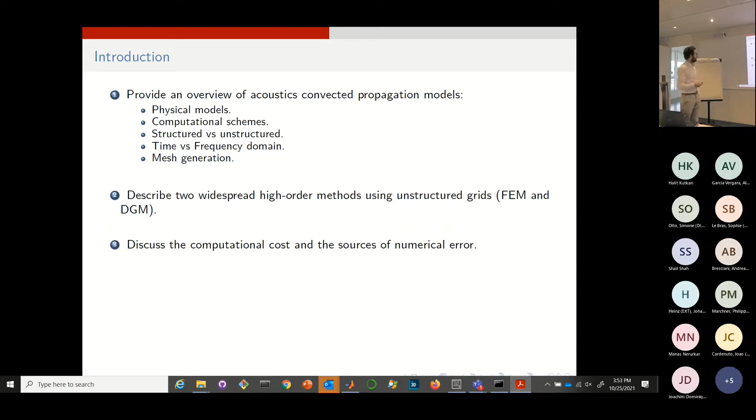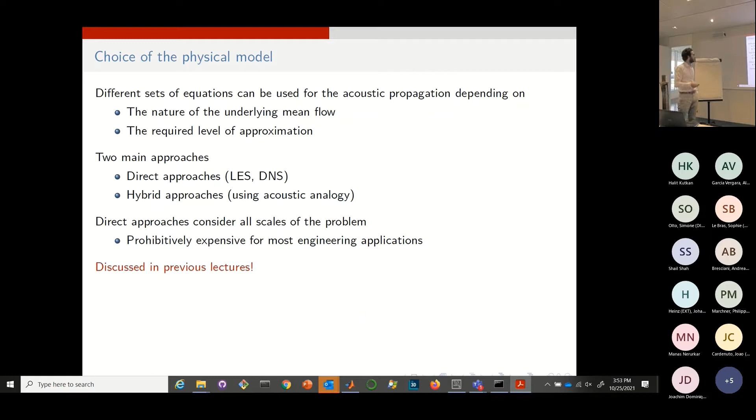That's a bit of a recap of what was discussed in previous lectures. Different sets of equations can be used for propagation depending on the nature of the flow and the level of approximation. There are two main approaches, what Sophie called DNS and hybrid approaches, and direct approaches. DNSs can be prohibitively expensive for most engineering applications, and I hope this was clear from this morning's lectures.

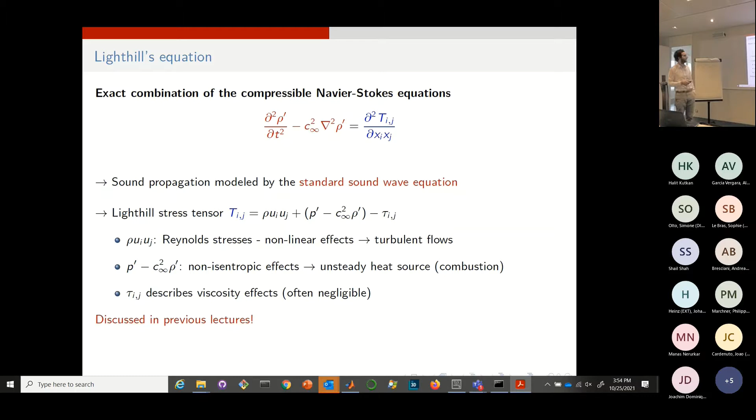This is a slide taken from Sophie, just to insist again on the fact that I will mostly focus on this part of the analogy, whereas Sophie described more the right-hand side in the previous lecture. So I will talk mostly about the propagation aspects.

Starting from this, a brief word about the lecture and its angle: it will mostly be seen from an engineering perspective.

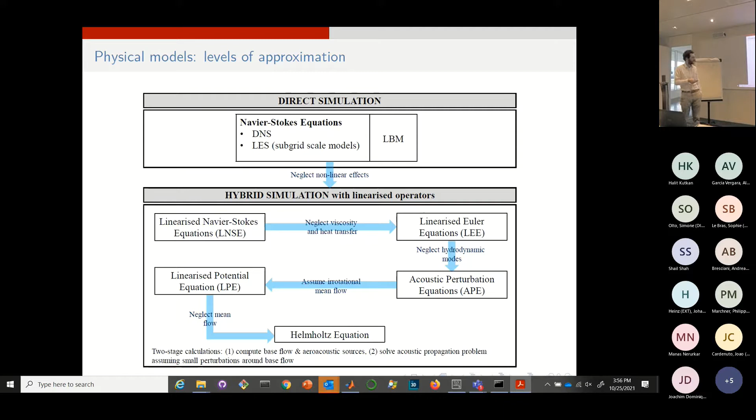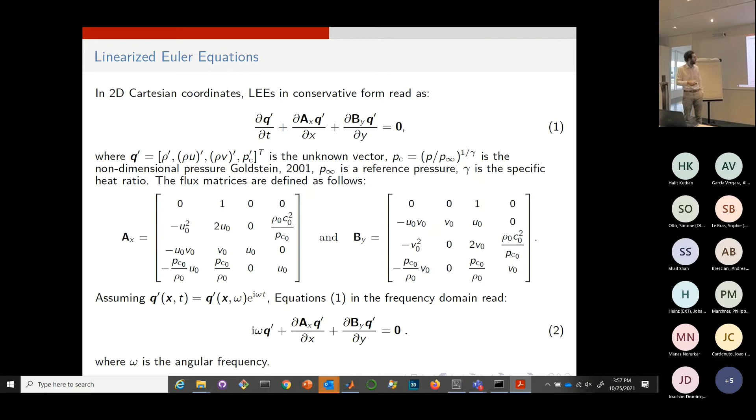Sorry, what do you call conservative pressure? I think it's pressure under Lilley's form. I don't know, it's P up to a factor, essentially. It's what we use. It allows you to write the LEs in conservative form to keep the hyperbolic form, but you can obtain the pressure from it very easily.

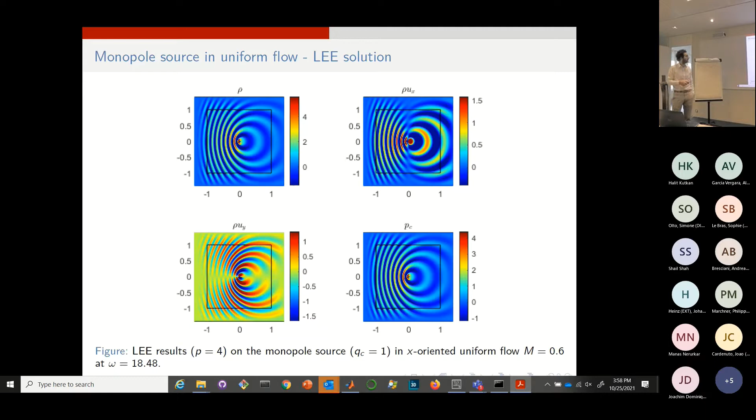So it's basically pretty classical. Now, interestingly, when you now consider a dipole, you take as the right hand side...

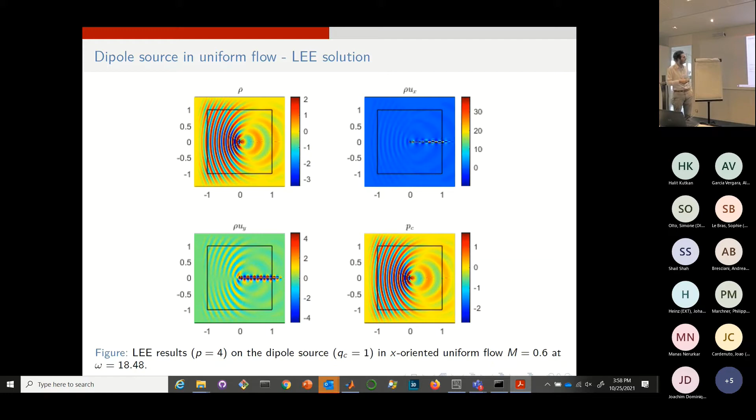So let me now dig a little more into what really the LE can support as types of waves. Actually, the LEs can support three types of waves: acoustic, hydrodynamic, and entropy waves. Each of them has a different dispersion relation.

That can be expressed in time or in Fourier domain. Note that the entropy and hydrodynamic waves, which are purely convected, are ruled by the same dispersion relation.

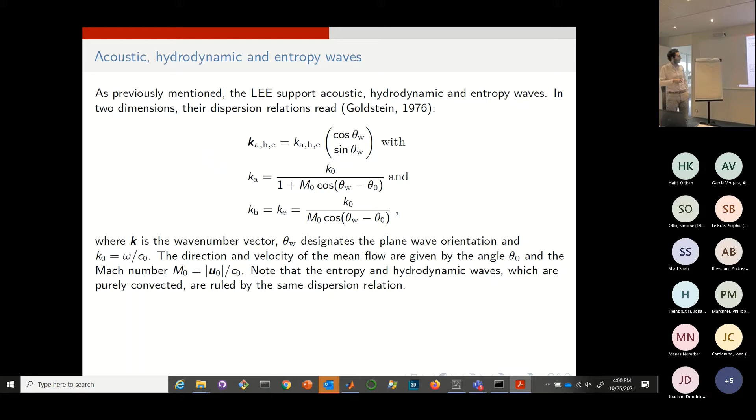Now we will have a look at two graphs which are a bit complex, but if you can understand this, I think they are very revealing of the physics at play in the LEE.

Sorry, excuse me, we're having a course here. We have to keep the doors open. Thank you.

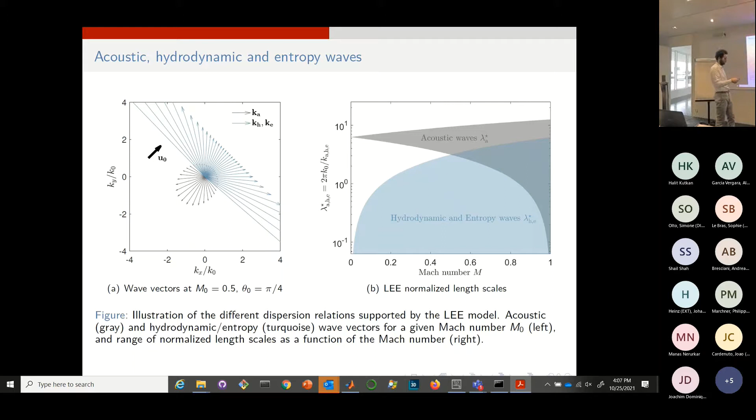Is there any imposition of a Kutta condition at the trailing edge in here, or just - you see what I mean?

No, there's no imposition. Now I think that numerically you don't necessarily need to impose it because - maybe, I don't know, you're ensuring that all quantities are finite by nature, but that's a sort of... Okay, yeah, but it's always complex, things. So here it's mostly leading edge.

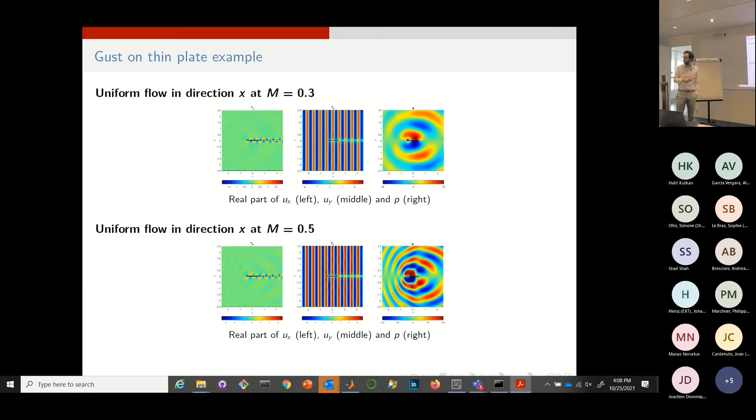Okay, now about the LE again. So the key message to bring home is that it supports acoustic, hydrodynamic, and entropy waves. Entropy and hydrodynamic waves are sheared waves, only convected with the mean flow, which have very different length scales. It depends on the Mach number regime.

Now, it's a very rich operator, but the fact that it's a very rich operator also leads to some issues.

So if you change the mesh - and this is certainly aligned with the remark of Miko, that whenever you have a numerical model, try to introduce some variations to see the sensitivities. That's something you can do. You change your mesh size, and you will realize that basically...

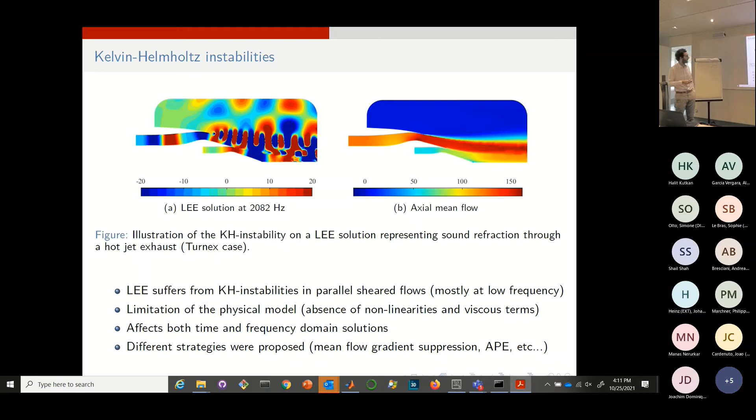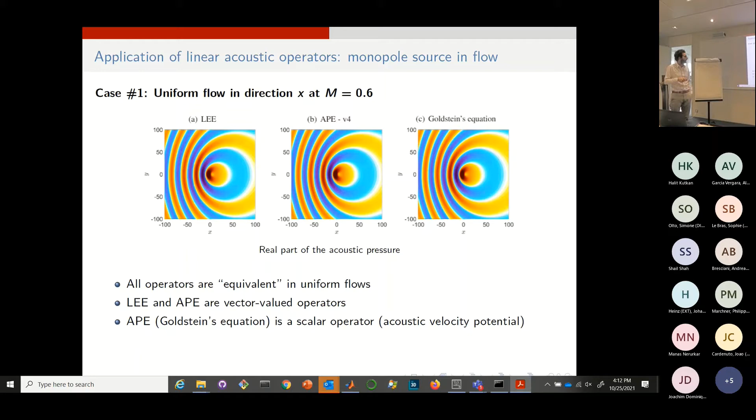And what I mean by mildly sheared flows - it's always in relation with the wavelength. So you always have to relate the gradient of the mean flow, the mean flow variations, and their scales, to the wavelength.

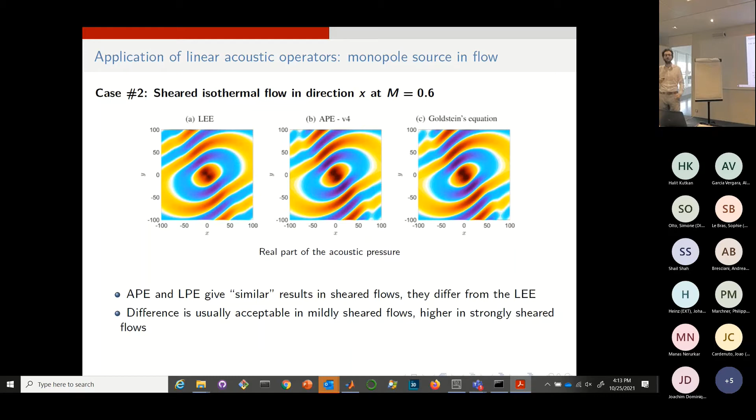And that's a generality. In the high frequency limit, these operators, AP and LPE, will converge to the LE solution. When the wavelength becomes really small compared to the variations of the mean flow, then you will converge.

But differences between these sort of approximate operators are usually emphasized in non-isothermal flows. So basically you can use those operators in sheared flows as long as they are mildly sheared, again in relation to the wavelength, and isothermal. If you use non-isothermal flows, you should really be careful if you have strong density variations.

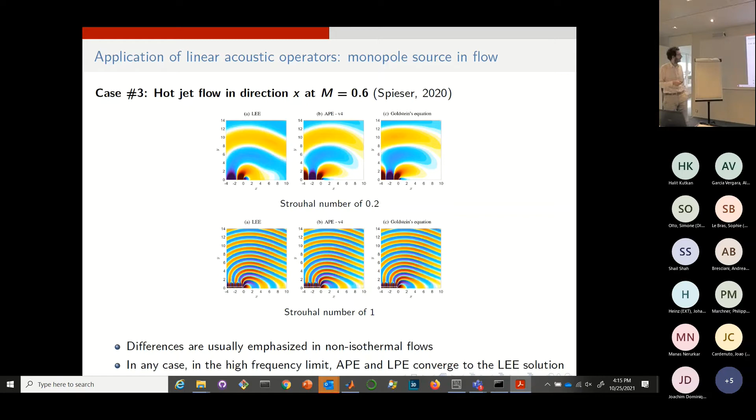So now moving on to... I have until 5? 5, huh?

Okay, thanks. So when you talk about solving these operators, you could think of modeling them in frequency domain or in time domain. When you do acoustics, you always have this duality, and depending on whether you did your PhD in time domain, 10 years after, you will always prefer it, it's a bit dogmatic somehow. But if you look at things in a neutral way...

Frequency domain is well suited for tonal noise. If you only have just 1 or 2 frequencies to compute, it seems evident that it's the right approach. Linear problems, obviously, but you can use it for broadband as well. You just need to compute many frequency lines to obtain a frequency sweep with enough detail in your spectrum.

Consider the way to avoid instabilities. It's true, I can speak personally, I was very frequency domain guy, and when you move to time domain, there are numerical errors or approximations that you can manage in frequency domain, it works. When you move to time domain, it's more demanding, because those errors tend to pile up as time increases.

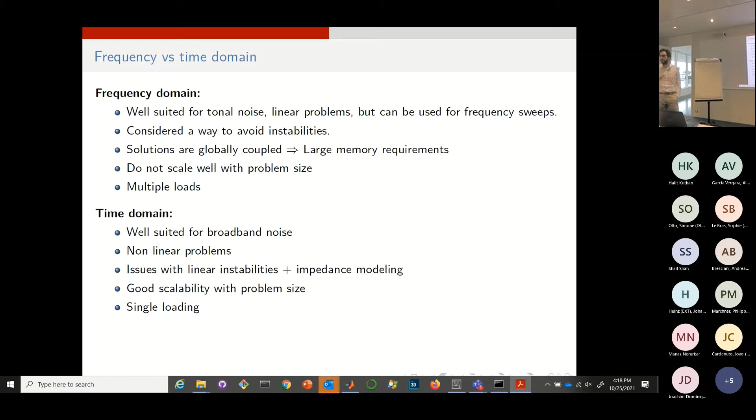Time domain, on the other hand, is well suited for broadband. You can do nonlinear problems, obviously. Again, as a general statement, it usually requires being very careful about discretization errors and stability. It forgives less, but it has good scalability with problem size, though you can solve only one load at a time.

Now you also have two main classes of spatial discretization schemes: unstructured methods and structured methods. Again, depending on what you used during your PhD, you somehow have a preference. It's funny to see that years after you still have this sort of preference.

Structured methods: it's easier to achieve high accuracy because you can reach low dispersion, low dissipation easily. It's a simpler data structure that leads to better optimization, especially on GPU. Now, designing grids for complex geometries is time-consuming and requires care to maintain grid quality. This is the major hurdle for the larger deployment of structured methods.

Recently there has been a breakthrough where people use more and more what we call immersed boundary methods, where you take your structured grid and place your CAD or geometry into that immersed grid. It's sort of hybrid because you're structured in most of the domain and unstructured along those immersed cells that you need to treat in an unstructured way. But you can still gain, because it reduces the complexity to only D-1, where D is the dimension, since your immersed cells will only be on the surface, so their number is limited.

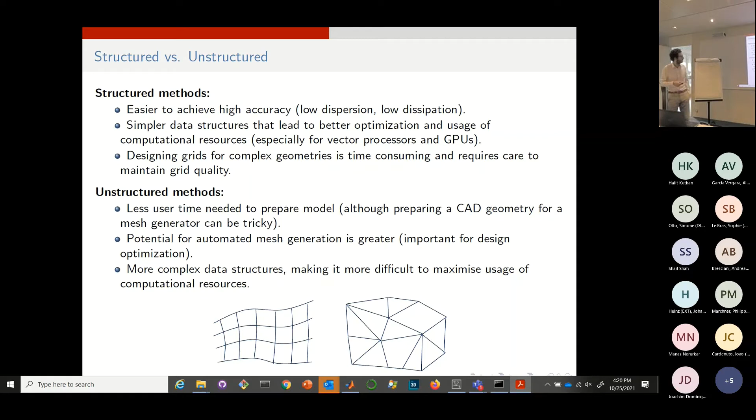In terms of numerical methods, you have the finite difference method, finite elements, the discontinuous Galerkin method, and boundary elements that are used in acoustics. In terms of whether they can cope with complex geometries, non-homogeneous media, and whether they are high-order accurate, I think the two most general techniques are FEM and DGM. FEM is mostly used for elliptic problems - that's a generality, kept a bit caricatural, but make sure you understand the main figures. I'd say FEM is most widely used for elliptic problems, formulated in the frequency domain, whereas DGM is typically used for time domain, hyperbolic problems. But again, there are versions of DGM also applied to elliptic problems - I'm summarizing.

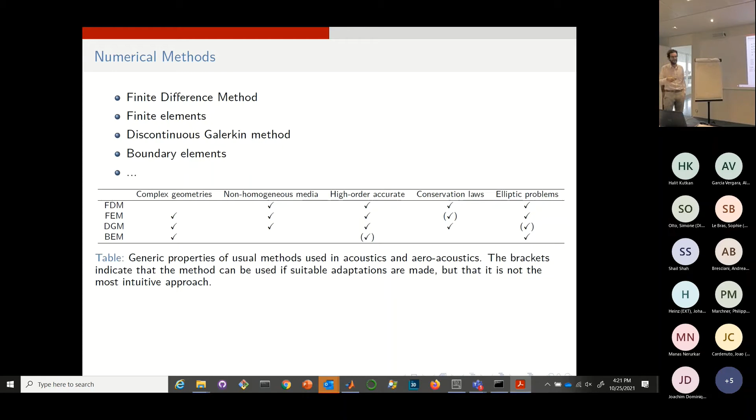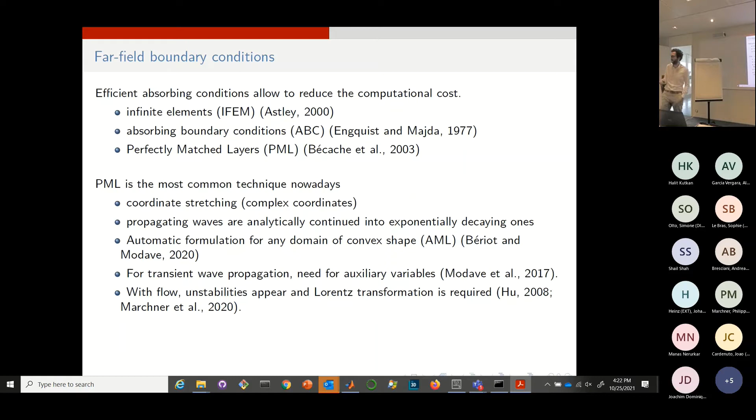About far-field boundary conditions, that's also very important when you do finite elements, DGM, or even finite difference - you want an efficient absorbing condition. There have been several, dedicated to acoustics, not buffer zones and so on. For acoustics you have infinite elements, absorbing boundary conditions, and perfectly matched layers. I think PML is the most common technique nowadays. I won't go into too much detail because we'll talk about this in depth on Wednesday, where you'll code a 1D PML and play with it to understand its principles.

There could be flow, right? I mean, not in this application - it's not fast enough that you'd need to include the mean flow convection effects. Do we know the speed of Tintin? I don't know the speed of the Tintin submarine. Just from the size of the propeller, I'm just guessing.

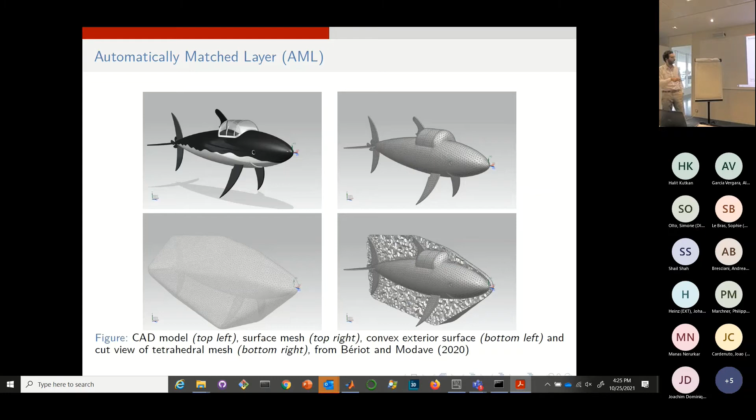But it's fully coupled, so it will be a dense matrix. It's too expensive, so we use approximations. You can use infinite elements, absorbing boundary conditions, or PML, and that's what we do here. The PML is generated automatically from this surface, but you'll learn more about it on Wednesday. This is the result of the scattering of that plane wave on the shark submarine.

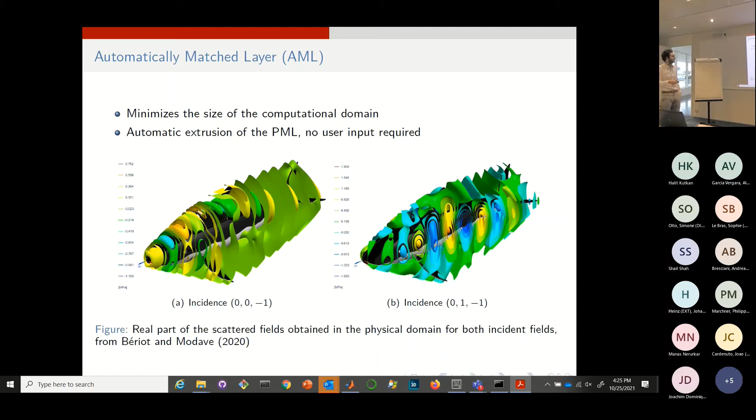About mesh generation, there are different types of algorithms. I think there has been a lot of progress in that area in the last 20 years. Now, in most commercial software, this is more and more automated. There are advancing front methods, Delaunay triangulations, and some methods even use octrees and quadtrees, these immersed boundary methods I mentioned, or even conformal approaches.

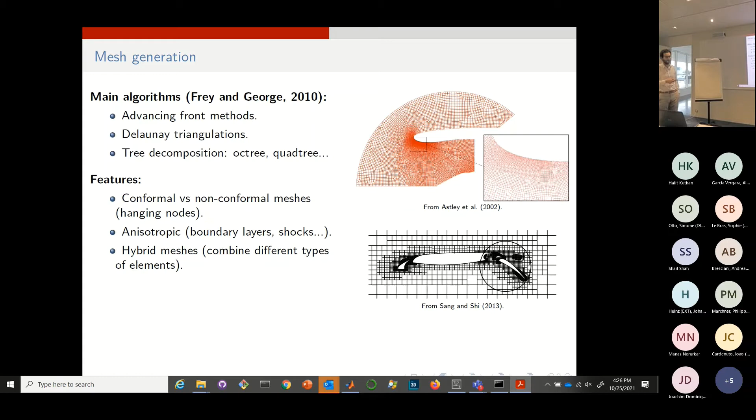You can also have anisotropic meshes in Star CCM+. Now they really have anisotropic mesh refinement that follows basically - you really see the mesh following the shock waves. But this is among the most advanced meshing technologies.

I will skip this. So I'll take a bit of time now to talk about frequency domain finite element methods. That's one approach to solve acoustic problems - to formulate them in frequency domain and use them to resolve them.

I'm going to talk mostly here about linearized potential theory. That's the LPE operator I talked about at the beginning, which is widely used in the industry for concrete aeroacoustic propagation problems, like the nacelle aero engine problem you will look at with Kortian tomorrow morning. Kortian will actually show you, hands-on in the software, how it works from A to Z to model such a problem in a commercial software.

So here we're solving a simplification of the linearized Euler equations. That's describing perturbations in potential mean flow, a near-irrotational mean flow. So there's only one variable, which is the velocity potential - it's a quite lightweight operator.

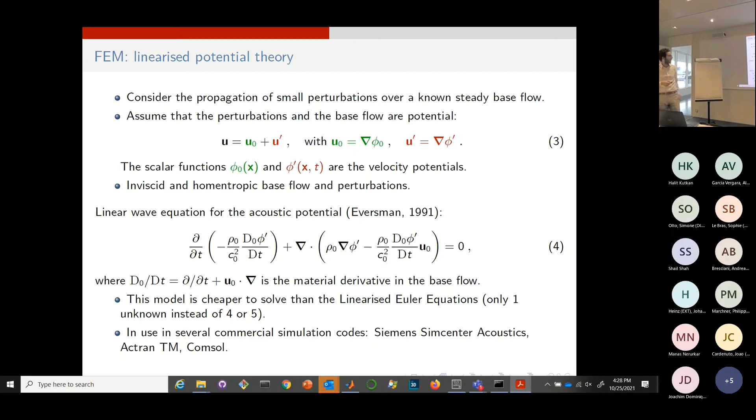It's used in several commercial simulation codes like ours, but also Actran, and COMSOL has it as well. This is used daily across the world to solve problems of convected acoustics. I think LEE so far is mostly used in labs, whereas routinely in industry people use the LPA operator to define, for instance, the liners in the nacelles. You will see that with Kortian.

So it's a classical Galerkin approach. I will not insist on the formulation itself.

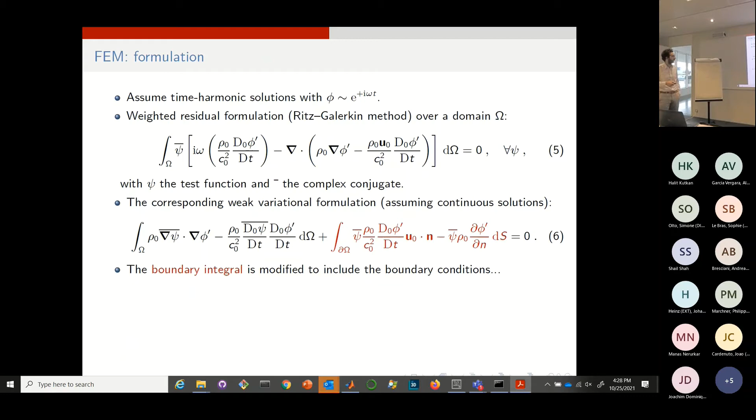The nacelle itself and this treatment are there also for acoustics, and the liner is there only for acoustics. It's designed to absorb, for certain regimes, certain flight configurations, especially when the aircraft is close to the community - when it's flying really high, then it's less of a problem. So takeoff and landing mostly, and cutback. This liner is tuned to basically make sure that mostly tonal noise is reduced.

If you hear aircraft today, when they fly over Brussels, which happens a lot, you don't hear tonal noise that much - that's my experience at least. You hear mostly airframe noise, and broadband noise from the fan. And the turbine - there's still a bit of whistling that is the turbine. But it's downwards.

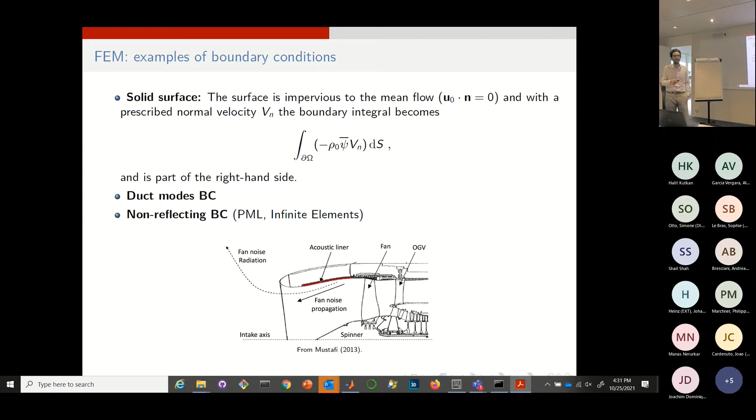There's still one subtlety, which is that the interaction of the boundary layer and the acoustic liner is very important, and it's not trivial to write. So we don't want to resolve the boundary layer in our operator, we're just going to consider a uniform flow and remove it because it's too small a length scale, it would kill our simulation if we had to model it. So we simply truncate the boundary layer, and then we apply what we call the Myers condition, which represents the continuity conditions between what happens above the vortex sheet and the liner surface. It's considering an infinitely small boundary layer, and it writes the continuity conditions so as to correctly represent the influence of the liner on the acoustic quantities.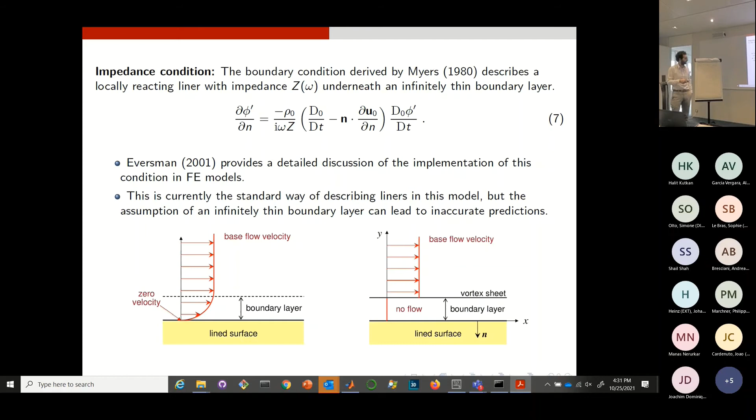So about the shape functions themselves, I will move on. I won't insist on this because we'll revisit it on Wednesday during the hands-on session with Simone. But basically, in finite elements, the solution is continuous. We construct a continuous solution across the full mesh, and for that we typically use linear and quadratic Lagrange shape functions. These are the standard shape functions. If you did FEM, I think most of you did some finite elements, you will have used these shape functions.

But actually, for acoustics, high-order methods yield significant benefits. Why is that? It's because acoustics is mostly about smooth solutions, representing linear combinations of sines and cosines. It's not like turbulence or shock waves where gradients are steep, it's basically differentiable. And in that context, if you want to approximate a smooth function, if you do polynomial regression, it's more efficient to approximate that function by increasing the order than by using many small elements with low order. You want to have a big element and use high order polynomial regression to approximate a smooth function.

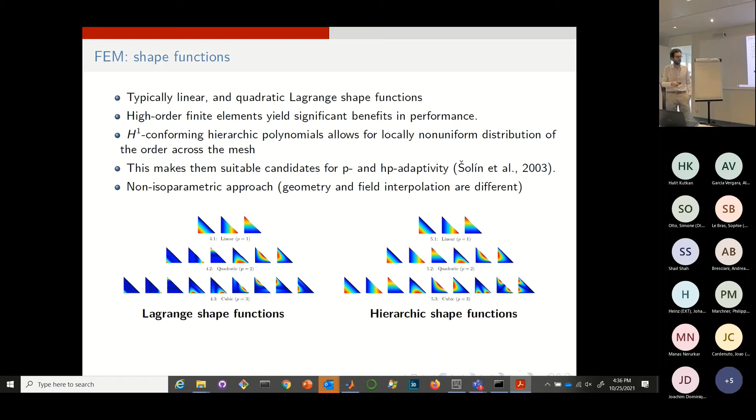But I'm going to increase the order until I get a correct solution. There are different ways to represent the field, what we call shape functions. This is how you interpolate your solution, and I won't enter into the details, especially because we'll look at that Wednesday.

Something important: when you solve a finite element problem in frequency domain, you have to solve at each frequency independently. And you end up with a system that is sparse, because basically when you assemble, this is the final system of equations at one frequency before you solve it.

And each of those, to simplify, here you have 200 unknowns. Each of those lines represents, to simplify, a pressure point that you're solving.

What you get is a sparse matrix, by contrast to BEM, which yields dense matrices. With finite element method, you obtain sparse matrices. Basically, it's because each node is only connected to its neighbors. When you do the assembly of the matrix, each node is only connected to the neighbors, and you will end up with only a few entries per row.

So if you have a structured grid with hexas, you can already infer a priori how many rows there will be in that matrix. How many do you think? How many hexas do you have in the center of your room? Let's say you model this room with structured hexas. How many rows will you have? How many entries will you have per row? 8? Which order? Order 1.

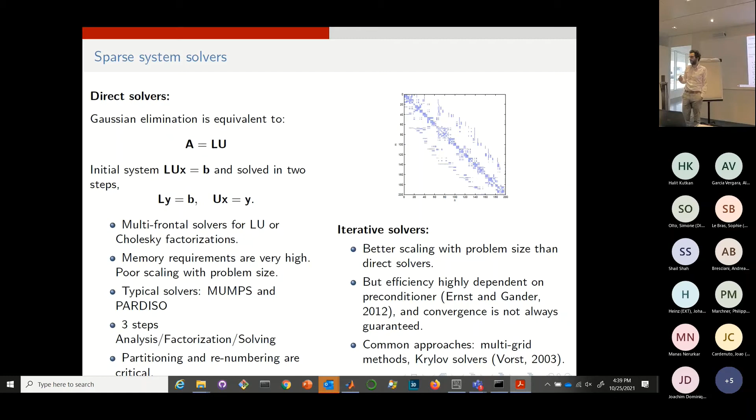About numerical accuracy — that's an interesting thing — when you solve a numerical model, especially for non-specialists, and including for specialists, it's a hassle all the time, because we have a sort of what I would call the error race. There's a competition between the errors. And somehow there is always one that is dominant.

There is always one that is in front, but it's hiding the others. So whenever you do something to tackle it, you will suppress that error, but the one ranking second in that error race will pop up. And you don't know if it's super low or if it's just behind. Sometimes you think you're going to treat the problem, but you're treating the second error in the error race. And since the only one that matters is the first one, you don't improve your solution. You see what I mean?

And that's something that is very puzzling. I think it's the cause of millions of hours of research time lost. So there are multiple errors. There's the geometry error — basically when you use a finite element or a discontinuous Galerkin or even finite volume method and you solve it, you're not going to solve the real CAD. You're going to solve an approximation of it.

Take the very well-known example of the scattering of a plane wave by a sphere. What you're actually solving is not the plane wave scattering by a sphere — you're solving the plane wave scattering by a disco ball, like the kind used for dancing, because it's faceted. So there will be lots of small numerical artifacts coming from this, which we call geometrical error, and it's there in the error race, but you don't know where it is.

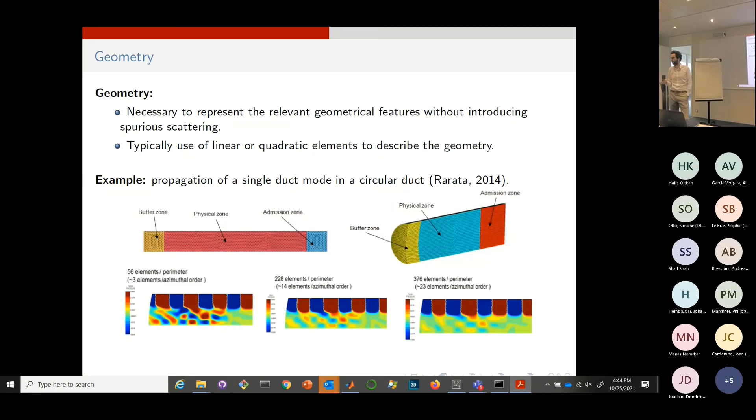So what we typically recommend is to increase your representation of the geometry whenever possible, so to use quadratic elements wherever possible, if you think about finite elements.

Mean flow interpolation is also something we looked at with Sophie, and it's quite tricky. At first I was thinking that if you increase the resolution and make the mapping as good as possible, it's going to be for the best. But actually there's a point where you introduce some super small length scales in your mean flow which are actually noise. There needs to be some smoothing in the mean flow interpolation for some applications, because your original mean flow is never perfect either. So it can be really, really difficult.

But you see, typically here, the mapping done correctly gives you this, and the mapping not done correctly gives you that. Here there are some very small length scales that may, for instance, trigger an instability in a time domain simulation—so those small details can matter sometimes. That's a shear layer, typically.

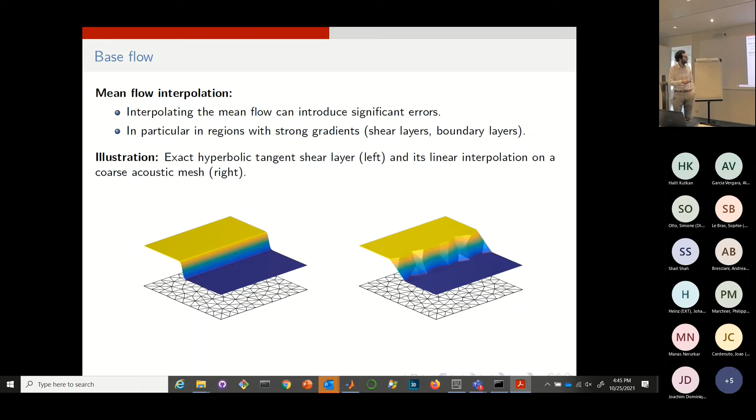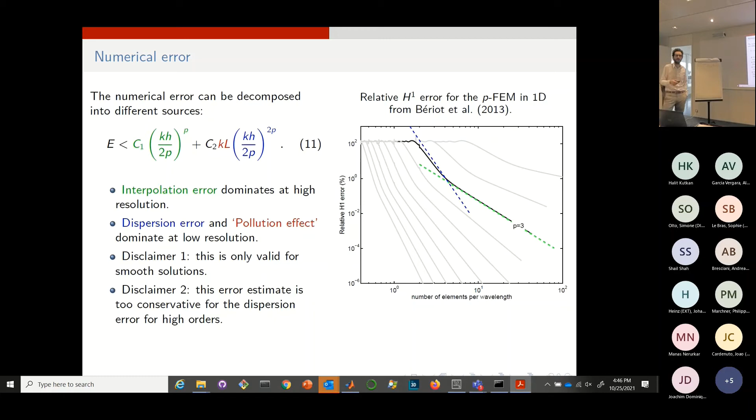About the numerical error, I won't insist too much, but just to say there are different regimes—this is about the spatial error. It's a bit technical, especially if none of you are really into finite elements, but there are basically different regimes. Your convergence depends on whether you are in the asymptotic regime or not. I won't go into that, especially since we'll have more sensible ways to discover this with the hands-on.

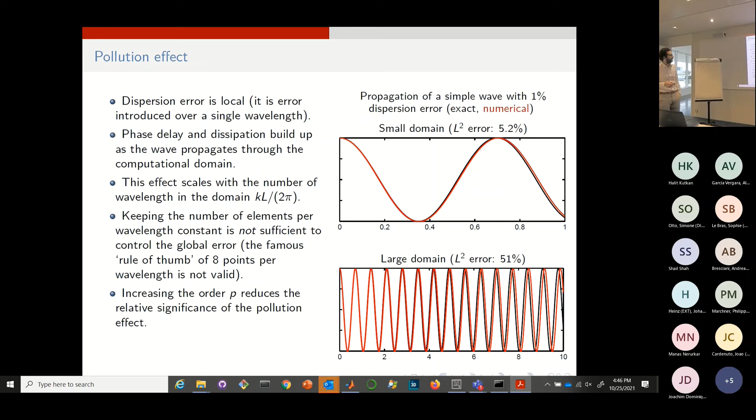Okay, so something we worked on quite a lot here at Siemens is adaptivity. But we worked on adaptivity for a fixed mesh.

In many acoustics applications, you actually have a wide frequency range from 20 Hertz to 20 kilohertz, that's 3 orders of magnitude in length scales. And the model preparation is difficult. So typically, what you may want to do is generate one mesh per frequency. You use the rule of thumb, you want 8 points per wavelength to represent your wavelength, at each frequency, 20 Hertz, 30 Hertz, 40 Hertz, 50 Hertz, and generate a new mesh, a very coarse mesh for low frequencies, super fine mesh at high frequencies. But that's very cumbersome.

Instead, we want to rely on a single mesh. The most common thing people do is refine on a single mesh. They take the highest frequency, the super small mesh, and say, okay, it's good enough for my highest frequency, I'm going to use it for the full frequency range. But that's very expensive, because you kind of overkill your solution at low frequency by orders of magnitude.

So what we worked on here is to basically use adaptive high order, to use a single input mesh, a coarser mesh, and then let the orders decide and vary across the frequency automatically without asking the user. We worked on this using a priori error indicators, and later on we extended it to having directional orders. But I will just show some examples.

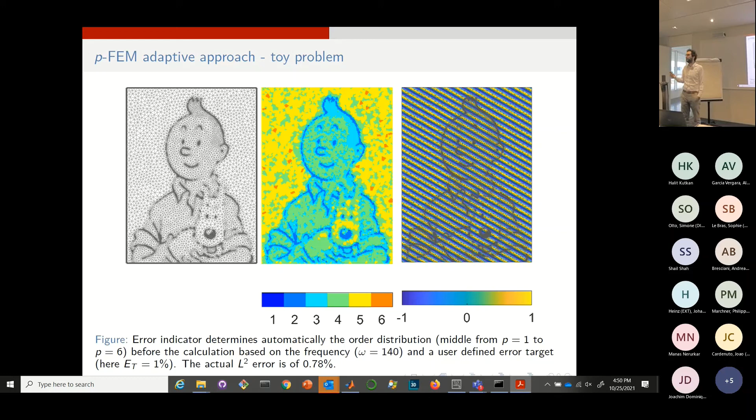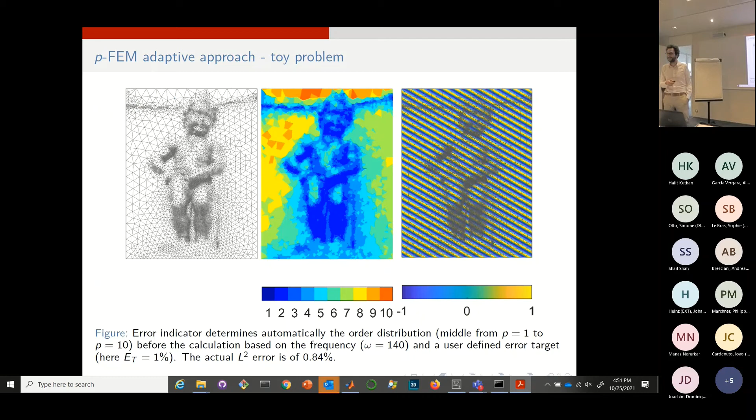So you can vary the frequency, and you can put mean flow also on top of it, and it will also handle that. So here it's just for fun, I'm introducing another Belgian example, where the notion of flow takes its importance - the notion of flow takes all its sense here, although it didn't resolve the hydrodynamics part of it.

Just to mention that when there is mean flow, you also have different length scales depending on the direction. So if you are transverse to the mean flow, your wavelength, your length scales will be larger than if you are upstream or in the direction of the flow, aligned with the flow. So along the flow streamlines, the scales will be shorter. So you can do anisotropic order adaptivity, meaning you can increase the order only in the direction of the mean flow, provided your mesh can be reasonably aligned with the flow streamlines.

And that's what we do here. We basically only increase the order in the direction of the mean flow, and we keep - I think here it's a mix of order 4 and 9 in the same element, but we enrich the solution only in one direction. You can do that as well.

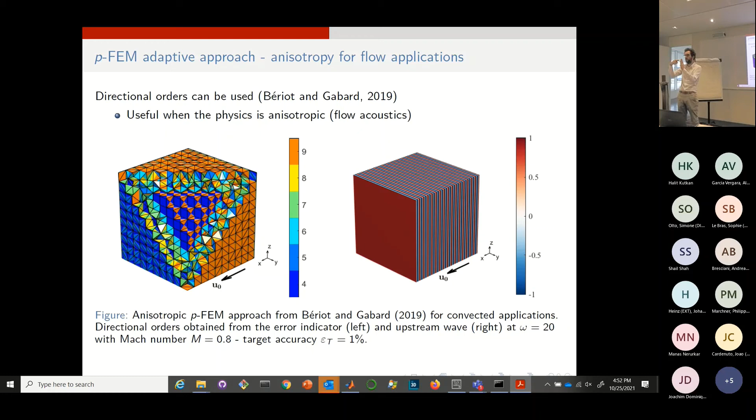So this I mentioned here. That's an example where it's quite an old engine, JT15D. It's probably from the 60s or so.

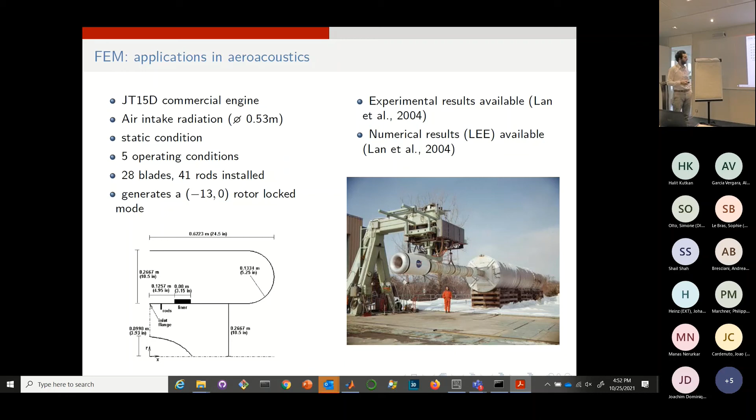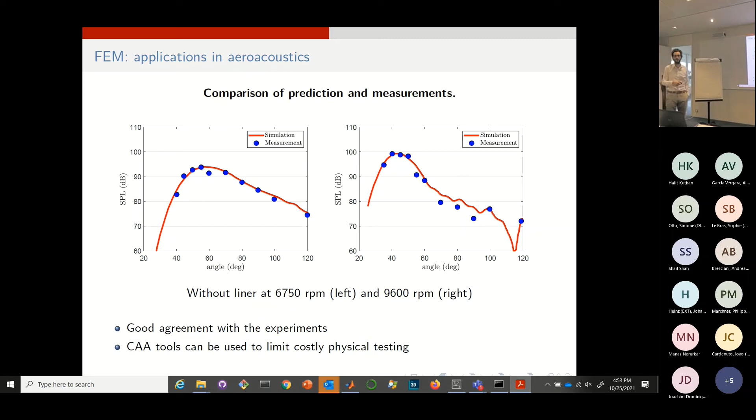Here we have a comparison. We're modeling the nacelle on this part here, just to show you that we have some comparison with measurements, and you see that you obtain reasonable estimations of the noise radiated with these methods. This is why they are used routinely in industry.

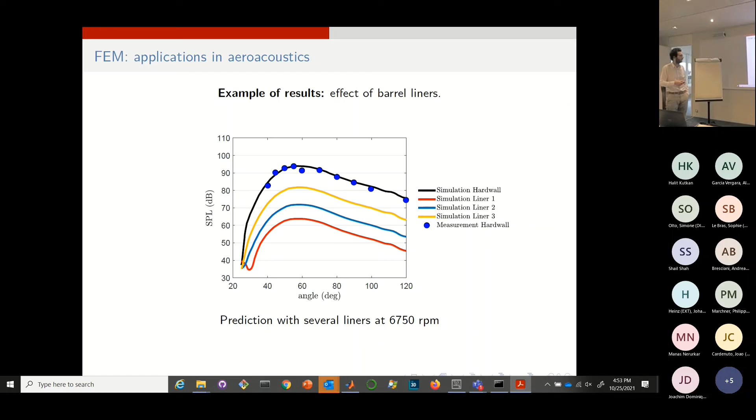And this is the effect of the liner. So this is hard wall, and then you can introduce different types of liners, and depending on the angle, that's the far field radiation. You obtain different spectra, and you can tune your liner based on that.

Now the main issue with finite element methods is the memory, because you still have to solve that big matrix at the end, and those linear solvers made for sparse matrices don't scale very well, meaning if you try to solve on a cluster, you will have lots of overheads. You typically can solve them on 20 MPI processes, 30, 40, but not 4,000, right? Not like finite volume, it doesn't scale that well.

So there are other approaches, and we're also looking into that, namely domain decomposition methods, in which you introduce physics, right? You kind of separate domains and you introduce some non-reflecting conditions using the physics at play. Whereas those linear solvers, like the backslash being able to do MPI, it's purely algebraic.

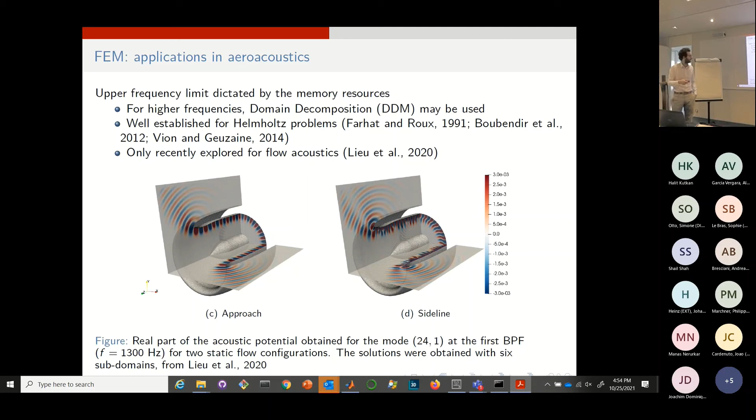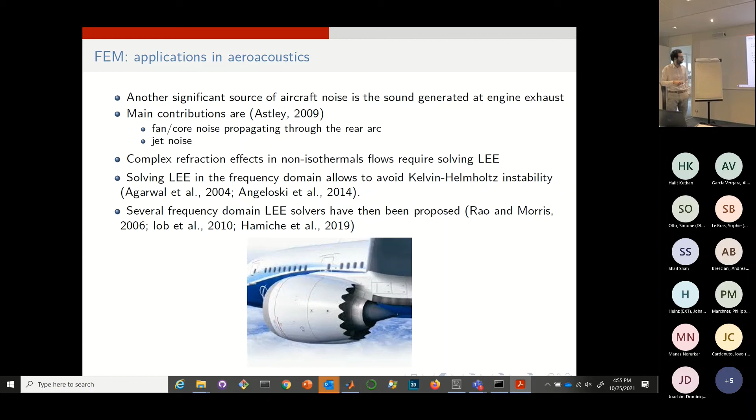And there we have tried other techniques. That's an example of an exhaust geometry. Just to show you in practice, that's the Mach number, the same example you saw before with the instability. You see here the vorticity magnitude, the rotational of the mean flow, and you see that you have a strong rotational component in the two shear layers.

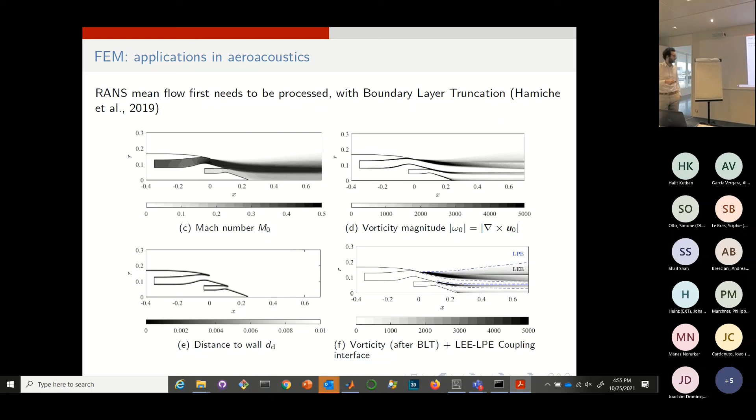I won't enter into the details, but basically we were able to generate some frequency domain solutions solving the LEEs in frequency domain for this type of application, but it's extremely demanding from a memory standpoint. We're still trying to industrialize that, so to speak. This is still sort of a proof of concept and not yet in the commercial software.

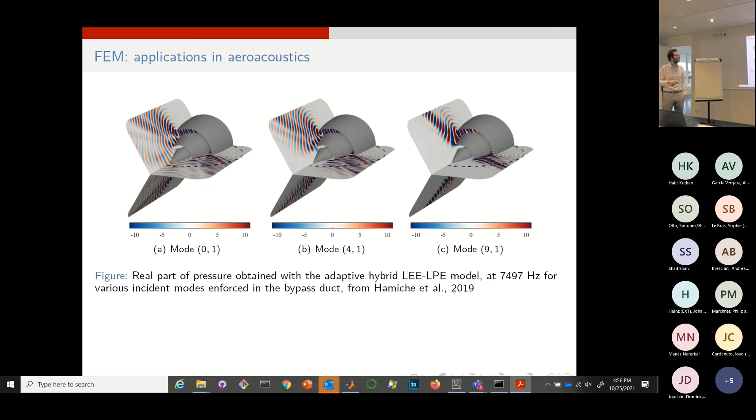Should I stop at 5, did you say, or 5:15? 5 or 5, I think it was 5. It was 5, right?

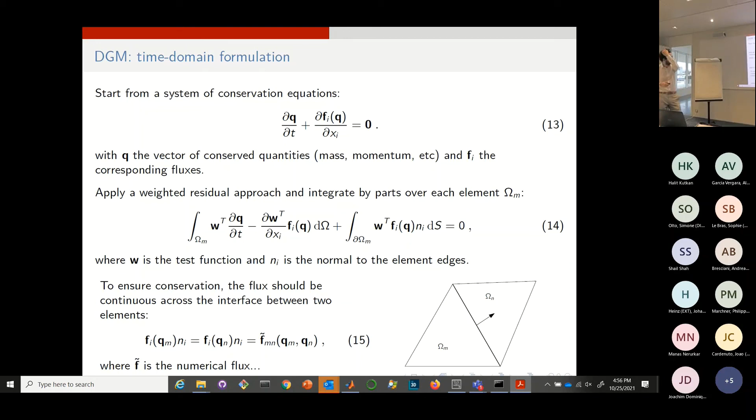Briefly, I mean, just to mention also that you can also use discontinuous Galerkin methods that are now getting more and more popular in acoustics applications. I won't enter into the details, but it's also a higher order method. And the main difference with FEM is that the solution is discontinuous across the elements, as the name indicates, right?

Finite element method constructs a continuous solution. So whatever, even if you get a rubbish solution, it will always be continuous. With DGM, if you get a rubbish solution, you will really have completely discontinuous fields, right? Because it's only through fluxes that your solution is made continuous. It's a kind of crossover between finite element methods and finite volumes. It's kind of finite volumes with high order capacity.

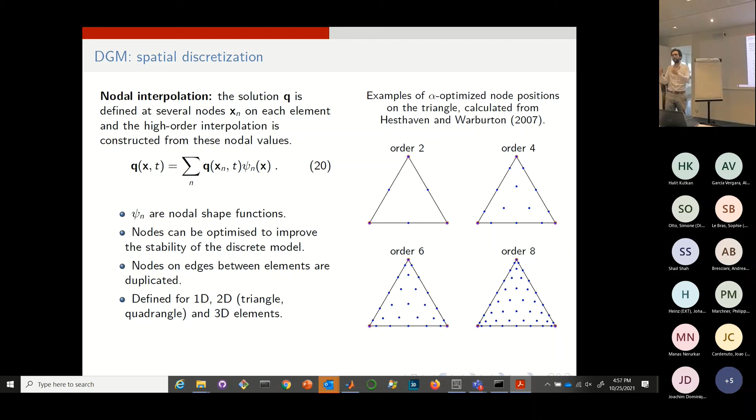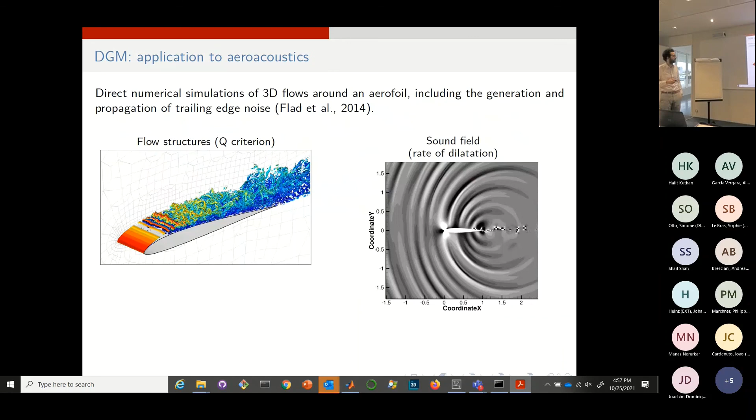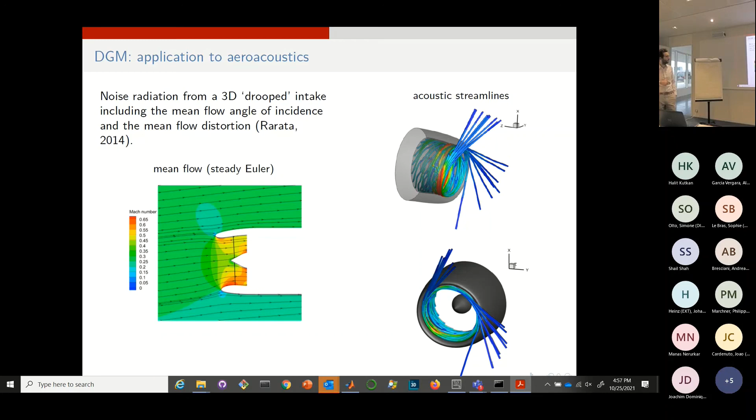So here, the advantage of the DGM is that in time domain, if you use an explicit time stepping, it scales, meaning you can really put that solution on a cluster, and it's more computationally demanding, but you can basically solve larger problems, so to speak. So that's why this kind of method is getting traction now.

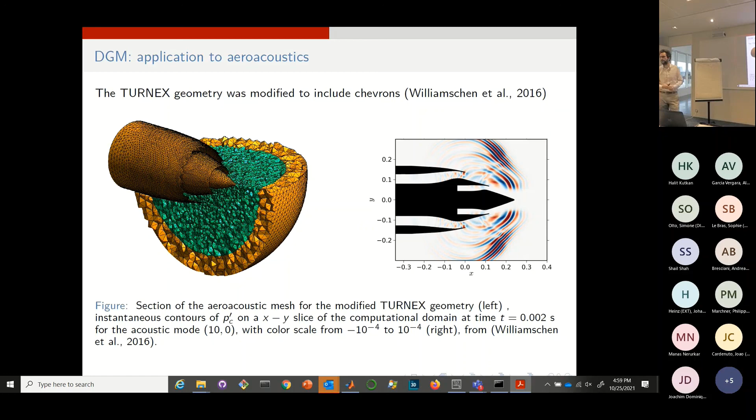Whereas in the CFD world, people use finite volumes, but in acoustics you want to use higher order methods, right? It's really beneficial. And DGM provides you a scalable framework to do that, to achieve higher order accuracy in space and in time, while keeping scalability.

So that brings me to the end of this presentation, and thank you for your attention. It was a long day, and I hope these three lectures could bring you more flavors of, I mean, deeper insight into aeroacoustics. Thank you. Thank you.

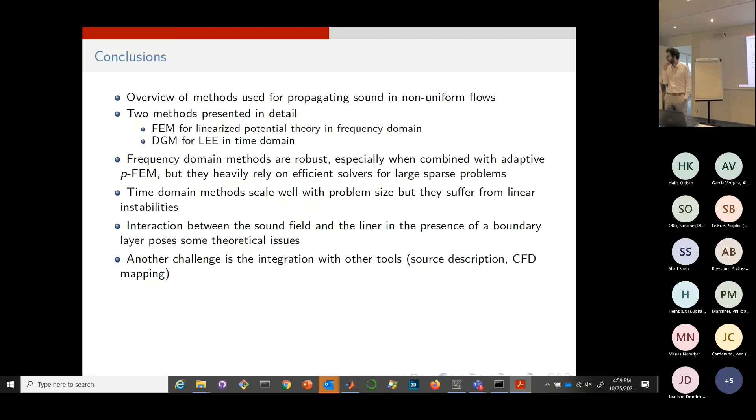I don't know if there are questions. I always have questions. You mentioned this race between the errors. Now, for the lame experimentalist that I am, are there some recipes that allow to identify which one is winning the race? Like if I vary this, if the error goes this way, then it means that the dominating error is of that kind?

Yeah, there are ways, you see what I mean? To make sure that I'm precisely not working in the wrong direction. I mean, if you keep everything the same and you have different frequencies, you know that geometry error will not pop up in low frequency typically.

You know also that, I mean, one way to look at things is always looking at wavelength, and if your geometry has 10 points per wavelength, you can consider that it's reasonably correct. Did you see what I mean? Yeah, kind of a black box procedure.

You have your code, and you vary this parameter. You vary time step, you see that you get the same result. It means that time discretization error is not first in the race.